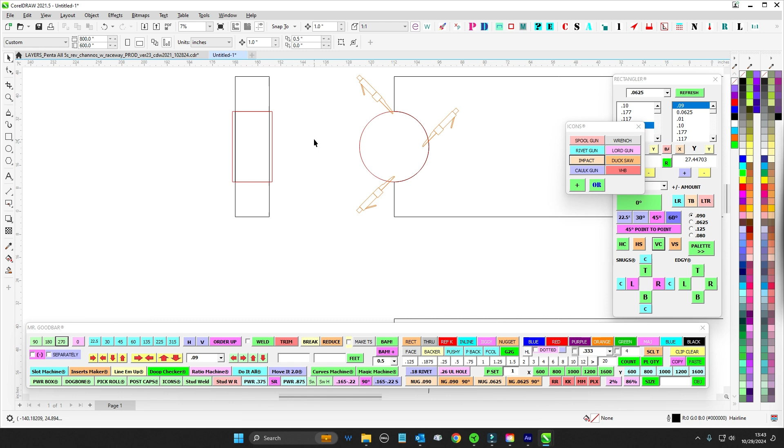So because we have that dent right about here, this kind of thrashed, and we've kind of gotten rid of that barrel look. We have at least one monument over there that does have the two separate logos to make it easier on ourselves and it just looks cleaner. So keeping with that and the new logo look of having a fresh facelift, full face, everything we've been doing is trim cap. So keeping with that, what I would do is just go over there and install can grind flat. Just get rid of the outer barrel, cut it smooth to the ends.

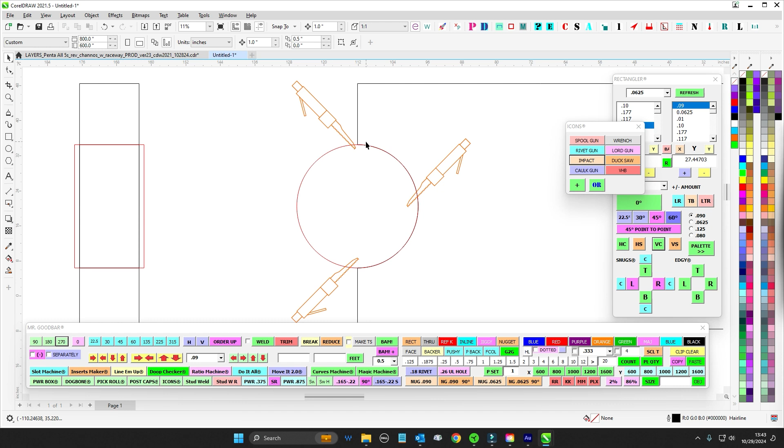And then I believe there's a flange, 1.5 inches or something like that, that's welded on the inside around there. So they can just grind that off and bring it smooth. As long as they stay within a certain amount, we're going to oversize the logo a little bit so they don't have to worry about it being too clean. They just have to make sure it stays within the boundary of the new logo. So then we're left with just the chopped out face. It's going to be open there.

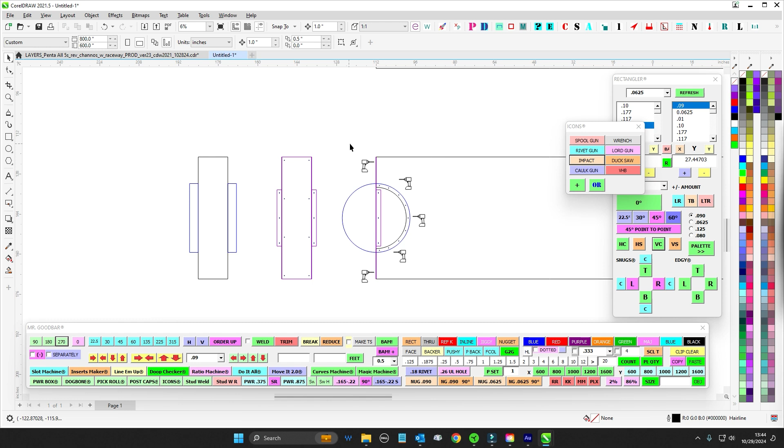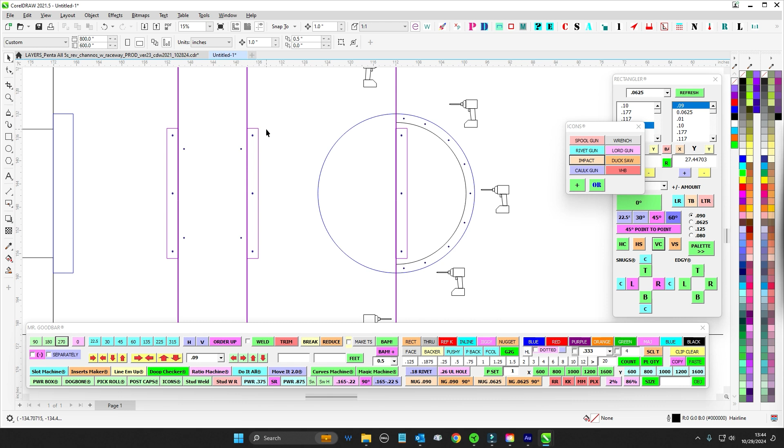But then what I would do is do bend scribes and put two flanges that would then be located within the semicircle. Then I would do .090. This is a 1.5 inch oversize to what is existing. Again, none of this is to scale per se, or it's to scale, but it's not to size. So that will cover up anything, and then that'll also allow us to mount that directly to the face. And then this would just be .090.

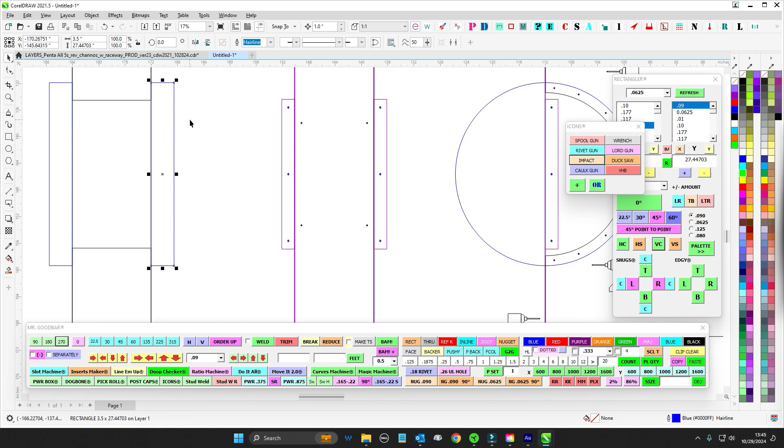Send out, this is 3.5 inch. So you could send out 3.5. The guys could have this from table out to paint in like 1.5 hours, 2 hours even if they don't really hustle. They just got to take the two backers. We'll send the returns out as well. They run it through the roller. They weld it up, caulk it up. It's out to paint. Then they can just trim cap faces. We're good to go. Then that allows for LEDs, right?

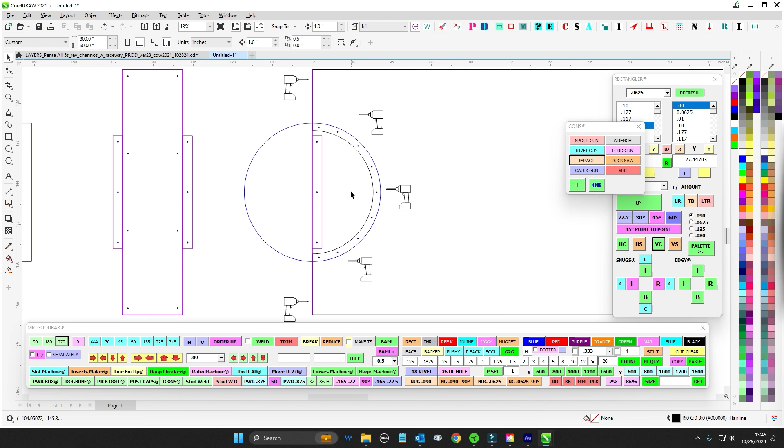So power goes right here. We run a leash, and then install can go ahead and just wire in a power supply to existing power. That way we don't have to worry about lamps. And then maybe even consider relamping this or upgrading this to LEDs if this is supposed to be lit up, because this is now going to be nice and bright in keeping with our new sign program. So the way everything looks, that's how I would do it.

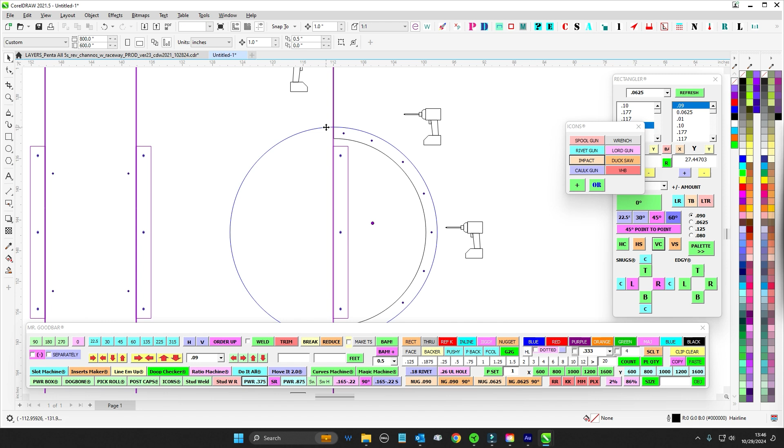And then also what's nice is once this gets nailed down, these 3 holes will correspond to holes in the backer. So install just lines it up, bam. And then they just use these for self-tap. And then when they flip it around and put the other side up, it's going to automatically be lined up. So they don't have to worry about patterns or anything, because this solution keeps everything lined up.

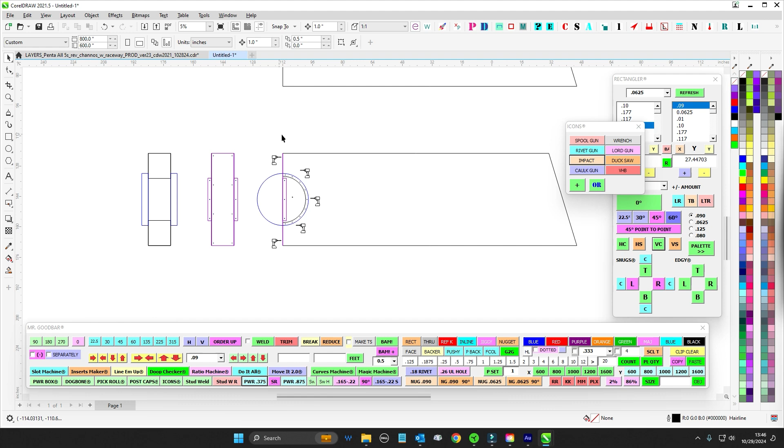And that closes it up nice. So they would just have to paint this to existing color, and then paint this to the new bronze, Duranodic or whatever. And then there you go. And then just trim cap face, and it'll be in keeping with our nice bright look on all the other signs. So that's how I'd do it. Just a heads up, just showing you my idea. So whatever your idea is, just let me know.